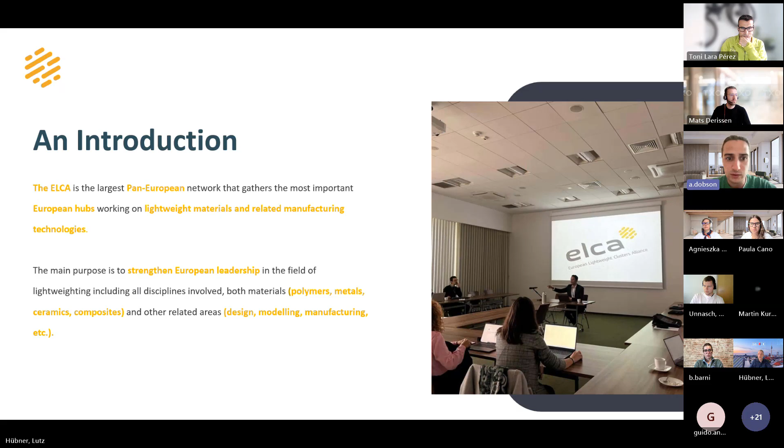Okay, so yeah, the ELCA network is the European Lightweight Clusters Alliance. It's a pan-European network gathering the most important European hubs, working across lightweight materials and related manufacturing technologies. So essentially, the purpose within the ELCA network is to try and strengthen European leadership across said domains, such as both materials and also other areas. So this could be multi-materials, for example, polymers, metals, ceramics, or composites, and areas such as design, modeling, manufacturing, smart materials, etc. So if you can go to the next slide, please. Okay, yeah, that's the right one.

So there's a multi-material approach, multidisciplinary approach, and multi-sectoral approach. So this is kind of a summary of the scope, but of course there's always room for delving deeper into different types of materials. So as you can see there, as I already mentioned, covering polymers, light metals, ceramics, composites; multidisciplinary, so across different areas within those materials, whether it be recycling or manufacturing or different techniques to look at materials, disassembly, modeling, functionalization, etc.

And through there, we have the working groups which span across different sectors of the value chain. And within sectors, we have mobility, energy, building, and industry. This is also something that we're always looking to expand within, and like today, delving deeper into the mobility sector to do some joint activities with rail transport. So next slide, please, Lutz.

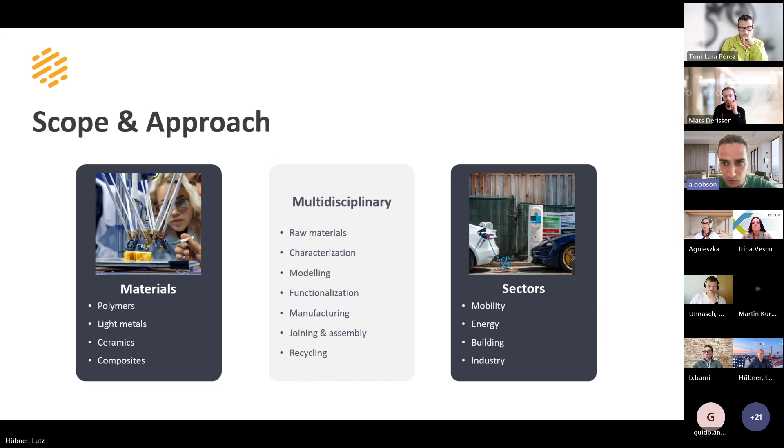And yeah, I think that's all for this slide. If you can go to the next one, please.

So as I mentioned, it's not particularly advanced, but copper is a strategic raw material in the EU since 2023. And I'm just going to show you this graph because it shows quite vividly that this material has become much more valuable over the last years. It went from this mostly overlooked metal that's always there to becoming quite valuable, with around 12,000 euros per ton in 2026.

And the main reason for this is that it has such a widespread use in electrical applications, and it's quite hard to substitute. It's what it does very well. It's not easy to find a good replacement. And the volume of copper has been increasing over the last years. We had 20 million tons of copper usage in 2020 in Europe alone, and the EU Commission expects that it will increase by 2050 by more than 50%. So it is very valuable, and for us, as our story begins, next slide, please.

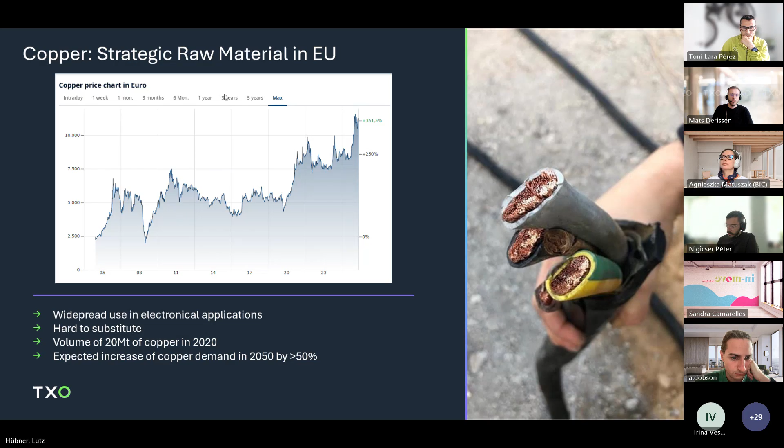We started quite early with the valuable copper material in 2007 as a company called Techport Service GmbH, and we mainly focused on the telecommunication sector in Germany. We worked with Deutsche Telekom, and we were mainly focusing on collection, transport, and logistical handling of the cables. And since then, we continuously moved on and made a shift towards a more full-service approach, so we covered more aspects along the circle than when we started.

And now, with the transformation to rail, we explored new branches. So we came into the rail sector and found out that basically the processes we have established over the last years in the telecommunication sector can be easily applied also in the rail sector. So all the processes we had already established were able to be transferred to the rail sector.

Since 2024, we became part of the TXO group, and we have had a much more international focus since then. We are still operating as a German entity in TXO, and we continuously widened our services in the rail sector. So now we have around 40 employees in Germany, 450 worldwide in 13 locations and 5 continents.

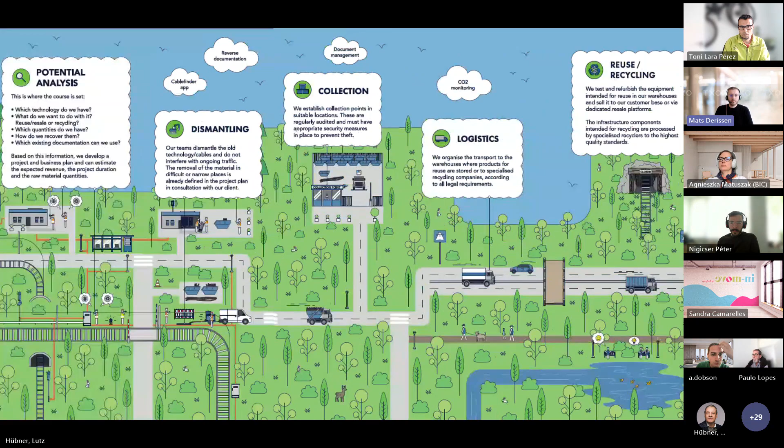We, as TXO, take care of the obsolete technology and provide all types of parts to it. So first of all, next slide, please. First of all, we start with the potential analysis. So what type of material do we have? Where do we find it? How can we access it? And oftentimes, the earlier we are invited into the process, the more materials we can recover at the end of the whole process. So if you want to get us on board, the earlier the better, basically.

And with the potential analysis, with the business plan and project plan, we can start the dismantling process, where we work closely with subcontractors we have already worked with for more than 15 years. So we know them very well. They know what we expect from them. And from that, we move on to the collection points where we store the valuable materials. We have regular security checks on these collection points, so we know the materials are safe there.

And from there, we move on to the transportation of the materials to the reuse and recycling facilities, or we prepare the material for resale. So whatever value is still in the materials, we try to shift it in the right direction. Next slide, please. And finally, we come to the reporting. We make an assessment of the material saved, the CO2 emissions saved, and also the whole transparent process. How did we get the materials? What ended up as waste? What ended up as recycling material, etc.

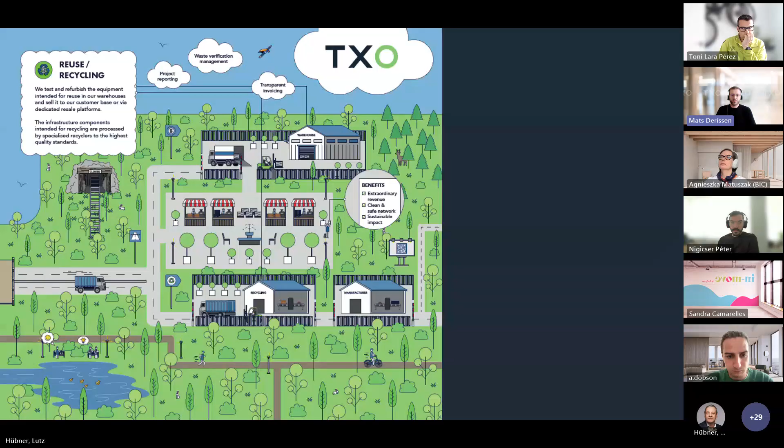At the end, next slide, please. Our main benefits are economic efficiency, mainly due to the efficient process we have established, but also the copper material has such a big value that it can offset the cost of the whole project planning and management of the materials.

We create clean networks. So after that, you can use the infrastructure again for the modernization projects, put in new cables and other technological aspects. And of course, we can create a secondary stream of copper. So we don't necessarily need to extract virgin copper from the mines, which reduces CO2 emissions as well. Next slide, please.

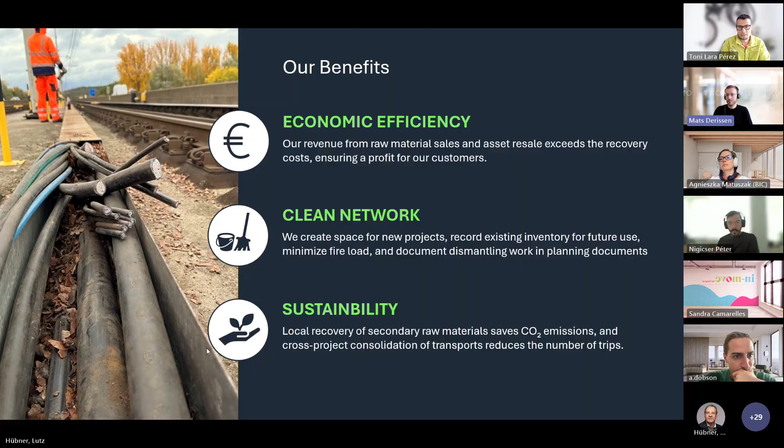No, I guess that was the last one. Oh, okay. Usually there are two more. I'm just gonna make a quick switch. Oh, one moment. You can see it? Yes.

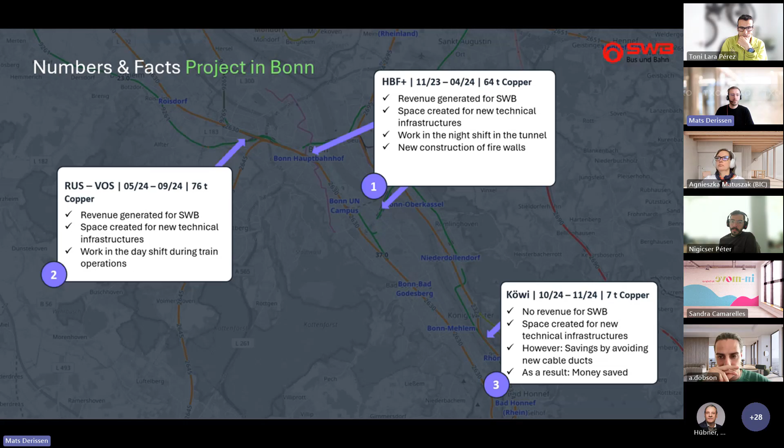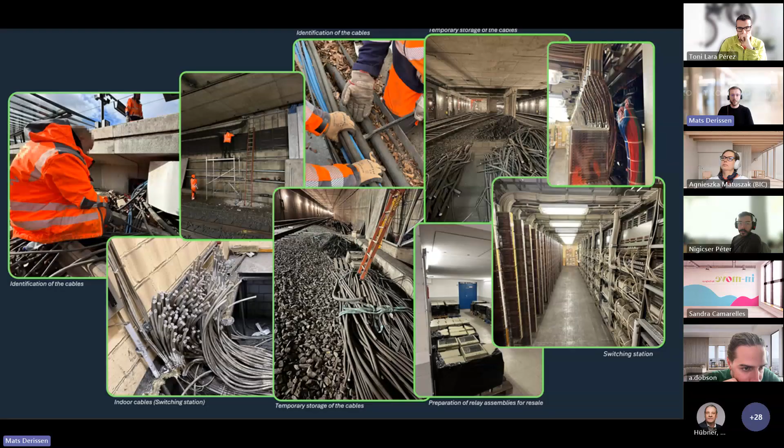And later on, we have a temporary storage, mostly of the cables, or as you see in the central right, we prepare material for the resale of it. So every time we look into the projects, we already know, okay, this can be resold, this can be recycled, this is roughly the amount, how can we exit it, etc.

And at the end, for this particular case, we made a certificate of the amount of CO2 emissions saved and the amount of copper saved. And it was also acknowledged by the local news, where they made an article about how urban mining actually works, and took our project as an example of the whole process.

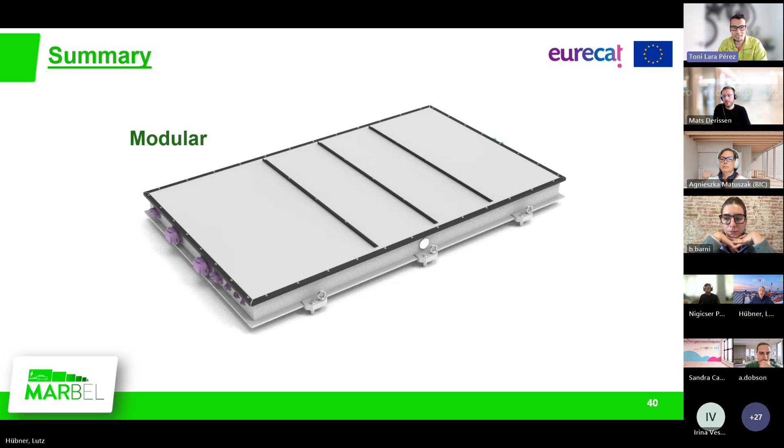Okay, thank you, Angus. So the idea is to present the battery design that we performed in the European project MARBEL, that ended last year. Please, Lutz. This is the battery of MARBEL. This battery is modular, it's lightweight. Also, it's thermally optimized and easy to assemble and disassemble. In this presentation, I will explain the modularity and the easy assembly and disassembly.

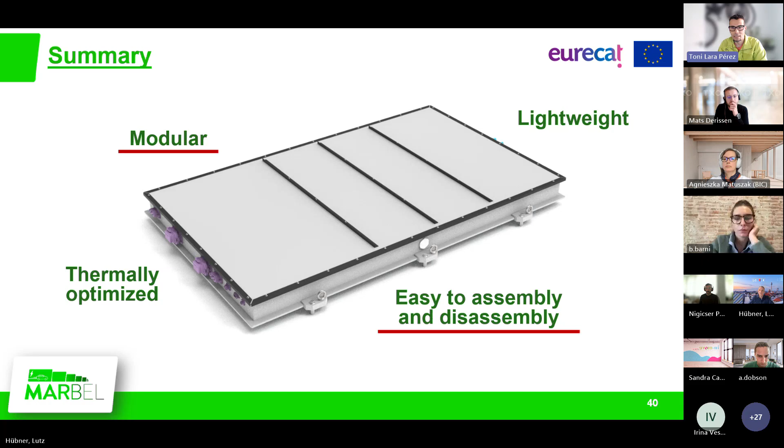Regarding the modularity of the battery, we built two different batteries: one battery of 800 volts and another battery of 400 volts. We use the same aluminum profiles for the housing, the lateral and the bottom profiles and also the turrets. The difference between the two types of battery is only the length of the profiles and the machining of the front profile used with the connectors. Next slide, Lutz.

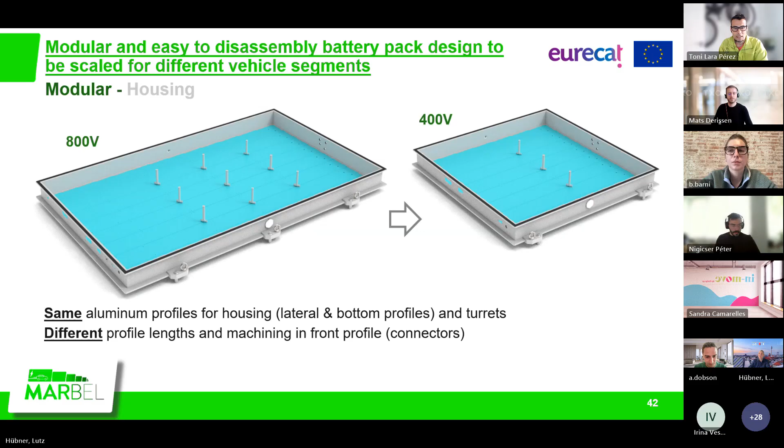Regarding the modules, we use the same modules for the two batteries, and the only difference between the two batteries is the number of modules. In the case of 800 volts, we use 32 modules, and in the case of 400 volts, we use only 16 modules. Next slide.

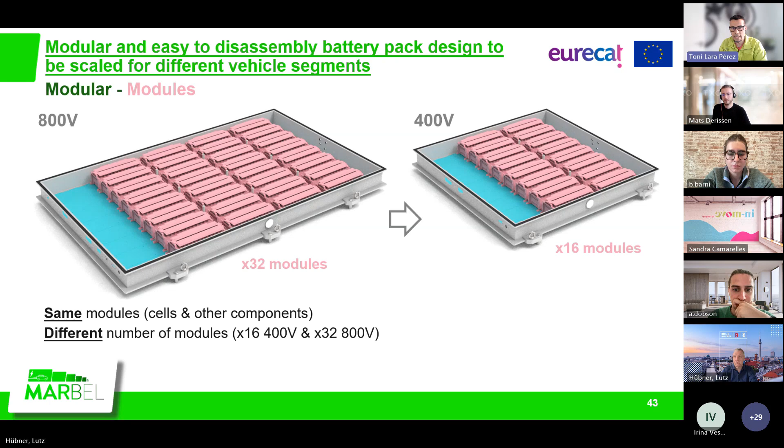Regarding the electric bus bars, the electronic components, and the connectors, we use the same bus bars between the different modules, the same electronic boards, and the same type of connectors and DC box. The only difference between one battery and the other is the bus bars that go from the modules to the junction box itself, and also the number of connectors and electronic boards. Next slide.

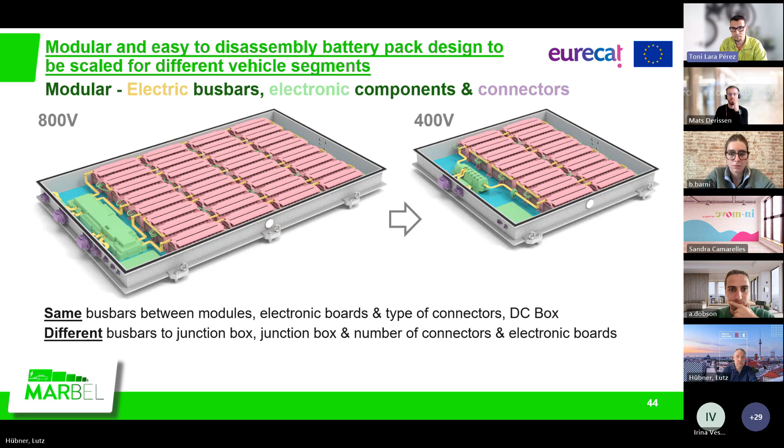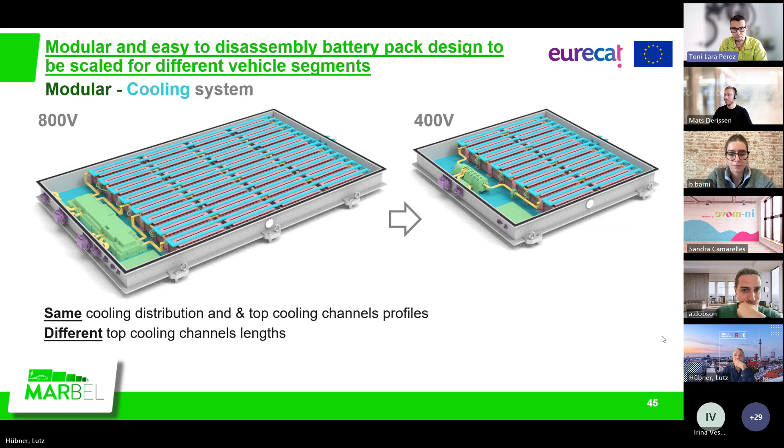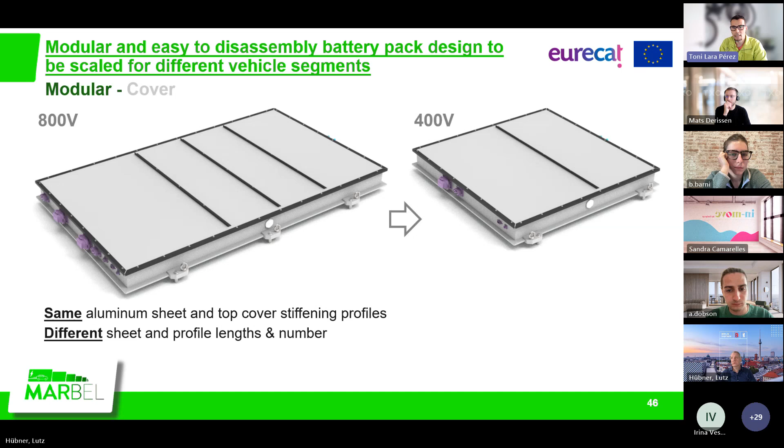Okay, next slide. Now regarding the easy to assemble and disassemble, here we explain about the battery pack. The battery pack housing was a fully aluminum housing, easy to disassemble and easy to recycle. And we use a 6063 aluminum with 60% of recycled aluminum. Okay, next slide.

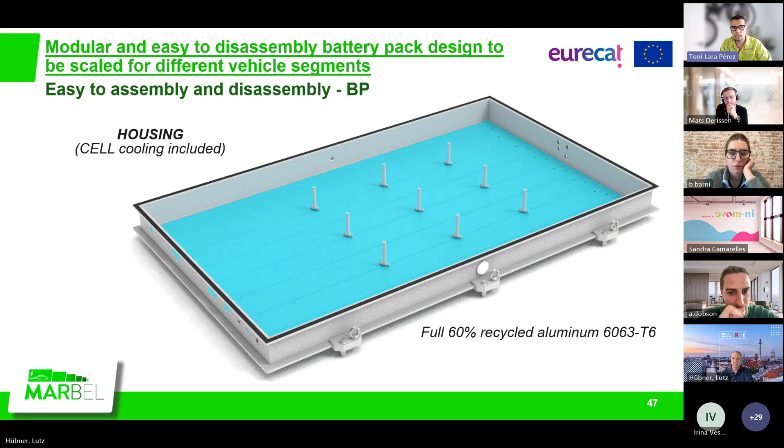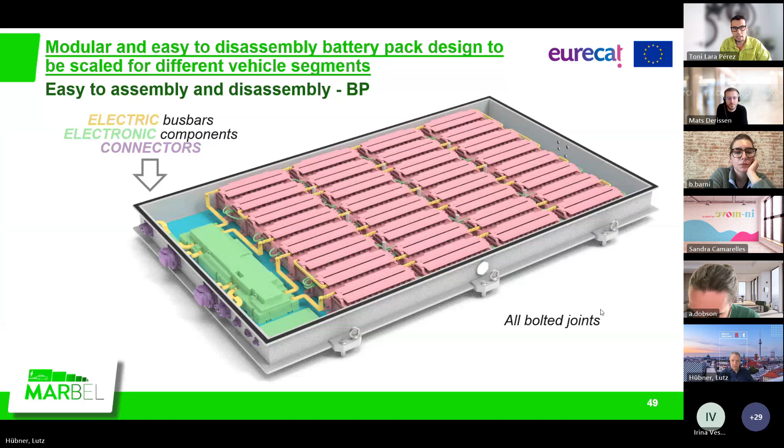Next slide. The cooling system also was screwed, okay? All the distribution of the cooling system was screwed in the housing. And in this case, we use two cooling systems, one in the bottom of the battery pack to cool the modules, and another one on the top of the modules to cool the bus bars of the battery. And these top channels were only supported by the modules.

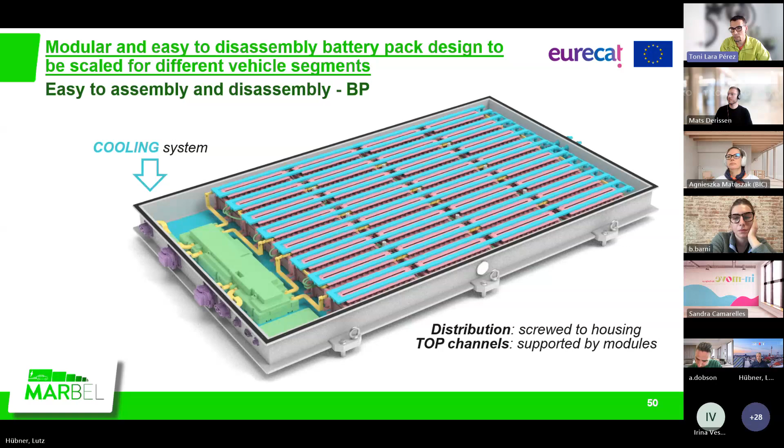Next slide. And finally, regarding the cover, also the cover was screwed to the housing. So the same principle to assemble the battery, we can use to disassemble the battery in reverse.

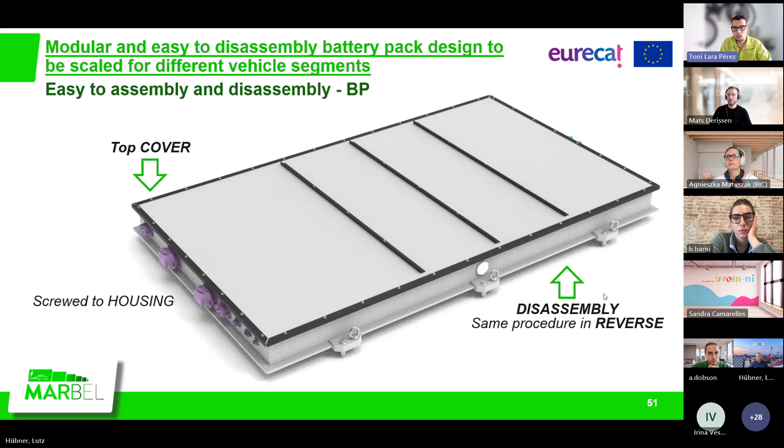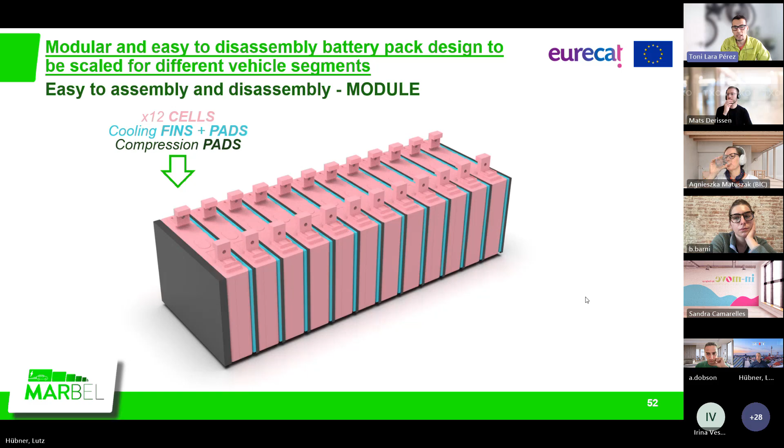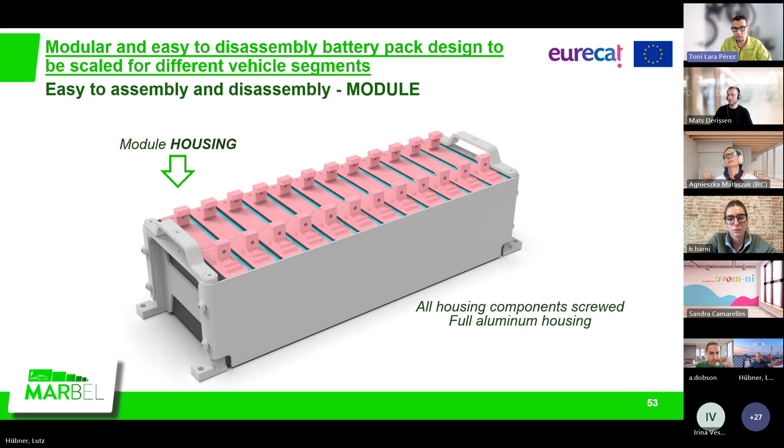Okay, and next slide. All the electronic and the electric components are bolted. Also we avoid, as I said before, the welded connections, so we can remove these electric and electronic components to repair or to remove one cell if this cell has some problem.

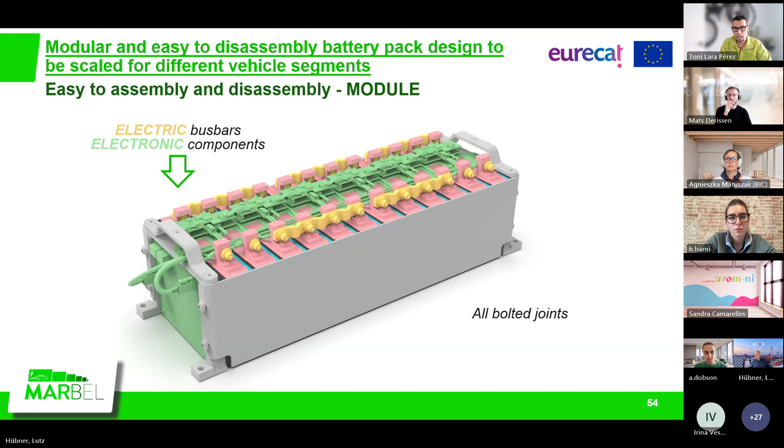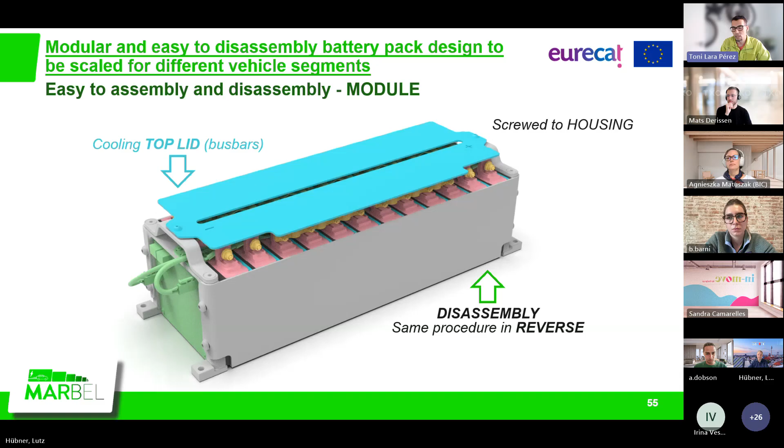And finally, the next slide, Lutz. It's regarding the top lid. This top lid is needed to cool down the bus bars, and also it's screwed to the housing. So we can use the same procedure in reverse to dismantle the full module and also the full battery. And I think that's all. Yes, it's all from my side.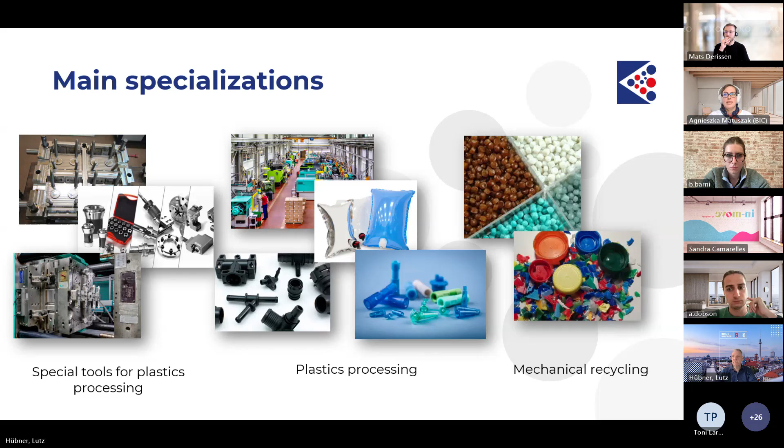Members of the cluster provide injection molds and other tools for polymer processing. They manufacture a variety of products for other branches, including automotive, medical products, cosmetics, electronics, home appliance, packaging, and many others. Our members also produce master batches, coloring agents, and modifiers, and supply plastic granules, machinery, equipment, and software solutions. They also provide services of assembly, packaging, storing, and recycling.

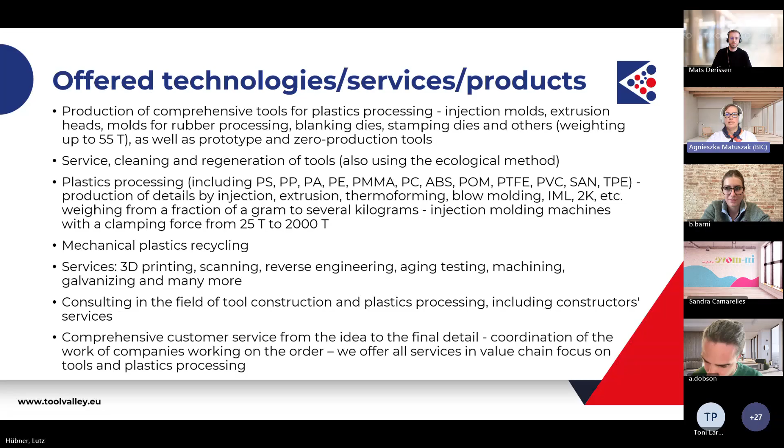By doing so, we create a value chain and a network of close collaboration that allows us to perform joint activities across many areas of the business. Next slide.

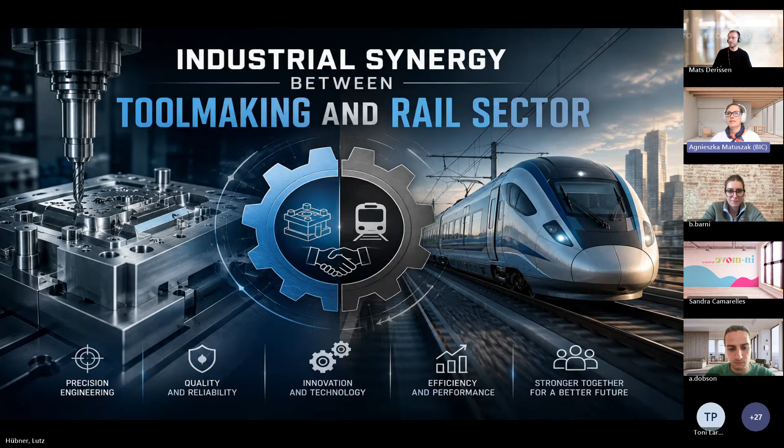The collaboration between the tool and processing industry and the rail sector unlocks a vast field of innovation. From rolling stock components to infrastructure systems, precision tooling is the foundation of modern rail mobility. Our solution bridges the gap between the tooling and plastic processing industry and the rail sector by delivering end-to-end support, from design and prototyping to serial production and component lifecycle maintenance. Next slide, please.

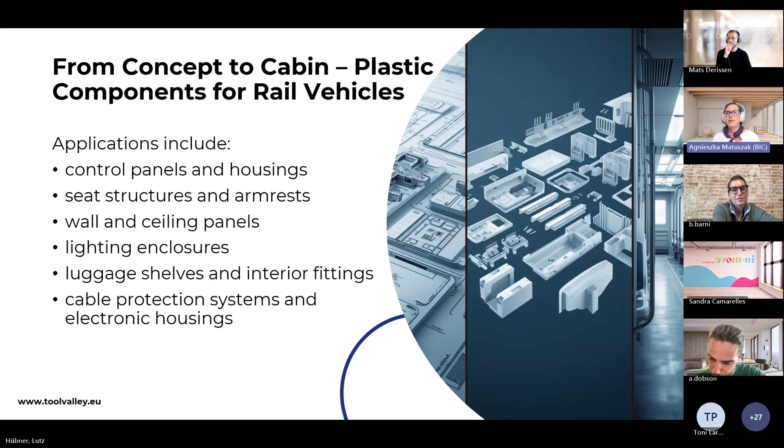Injection molding and advanced tooling enable the production of critical interior and functional components for trains, trams, and metros. Applications can include control panels and housing, seat structures and armrests, wall and ceiling panels, lighting enclosures, luggage shelves and interior fittings, cable protection systems, and electronic housing. Plastics are now essential in both passenger and driver cabin environments. Next slide.

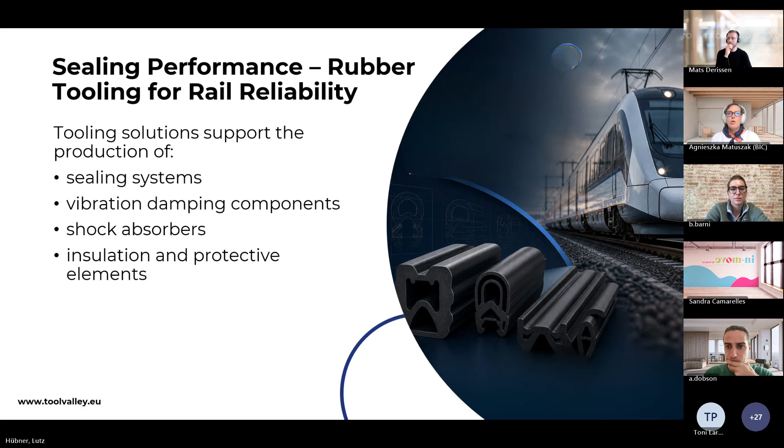Rail systems demand durability under extreme conditions. Tooling solutions support the production of sealing systems, vibration damping components, shock absorbers, insulation, and protective elements. Precision rubber tooling ensures safety, comfort, and long-term operational reliability. Next slide, please.

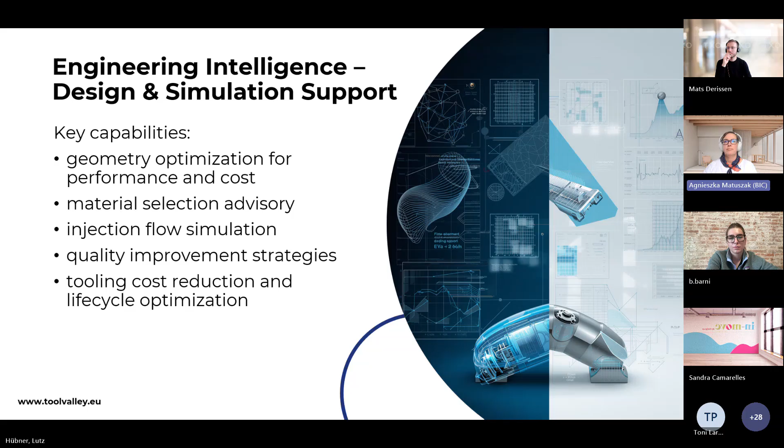Modern tooling is not just manufacturing, it's an engineering partnership. Better design means smarter production from day one. Key capabilities: geometry optimization for performance and cost, material selection advisory, injection flow simulation, quality improvement strategies, tooling cost reduction, and lifecycle optimization. Next slide.

Speed matters in rail innovation. We enable rapid prototype tooling, 3D printed molds, inserts and components, pilot production runs, technology validation testing, from idea to functional prototype in record time. Next slide.

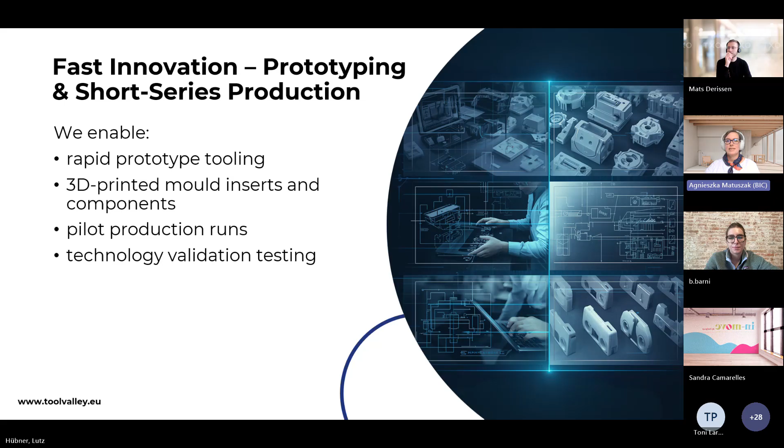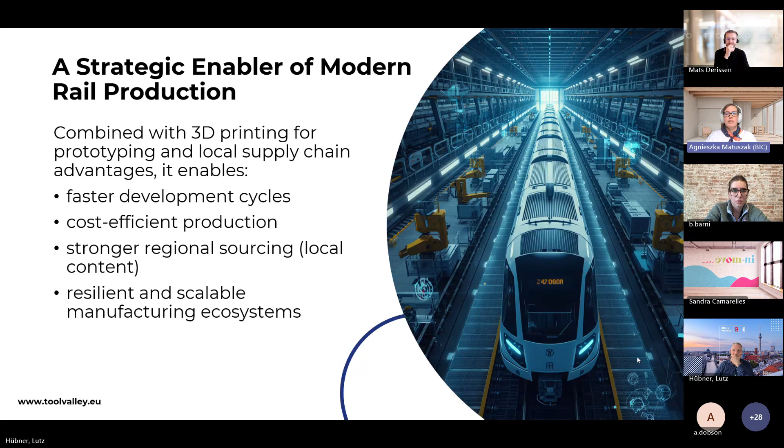Probably we will go to the last slides. Yes. So the high quality and extensive scope of the offered services is a result of technological advancement and innovative approach of the cluster members and the cluster's close collaboration with R&D units. Owing to this, our companies supply products to the largest global companies operating in various branches of industry, to almost all European markets. We invite you to do business with us. Thank you.

So I wait for two seconds for Angus. Thank you, Agnieszka, for these interesting insights into your cluster structure and topics. It was very interesting to us. And I'm asking Angus if there is an additional pitch. From what I gather, I believe there was some interest from Martin. Let me check. Martin from RISE, I believe. Yeah, okay. I see him here as a participant.

Hello. Yeah. Thank you very much, Lutz. I believe it's a bit of a last minute entry, so we're very appreciative. Yeah, I can just pitch shortly who we are. I just need to reopen the slide here and share with you. And I can send it to you afterwards. Wonderful. Thank you very much.

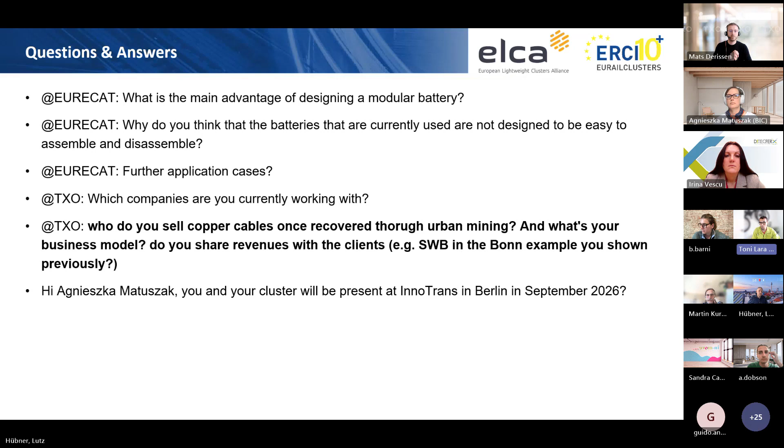The main advantage of the modular battery is that it's for different types of cars, because we can use the 400 volt battery for one segment of cars, little cars, and we can use the 800 volt battery for another segment of cars. But we can also use the same battery for a bus or for a train, because it's a modular battery. You can increase the battery if it's necessary, so you can build the battery as you want.

Yeah. So then I have at least two questions for Mats from TXO. Which companies are you currently working with, Mats? Yes, thank you very much, Lutz. So currently we are working with metro providers in the larger cities in Germany. I just showed you the example of Bonn, but it's also in Stuttgart, Cologne, and Nuremberg.

So they are the smaller sized companies in regard to the rail systems, but we also work with OEMs such as Siemens Mobility, and we just started now to expand into the international market, with first projects in Salzburg in Austria, and we are also piloting in France.

So what we experienced over the last couple of years is that the process we have established is easily applicable to all types of partners, smaller scale and larger scale, as well as OEMs, and it's applicable in Germany and also in other parts of Europe. So this is the range of partners we are currently working with.

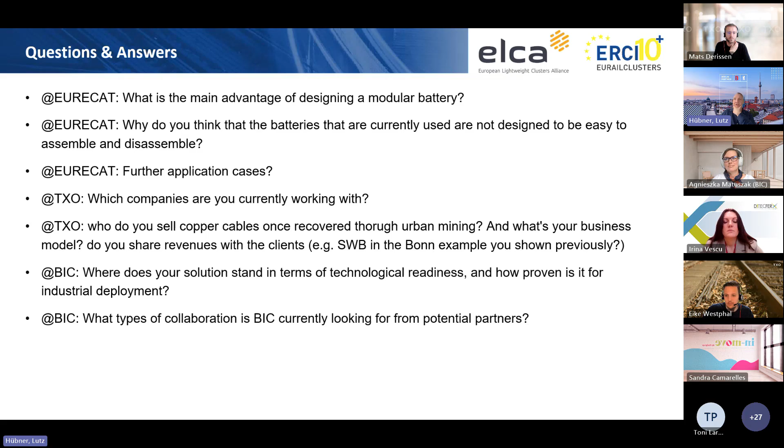All right, thank you. Coming back to TXO, 3 important questions. One question, when you send off for recycling, do you know what happens with the remainder of the materials aside from copper, the plastics, etc.? Yes, thank you for the question. We track everything within our system, and for example, in terms of the plastic, we know that they're recycled for the traffic components. So when you build a construction site, barriers, the foundations. Yeah. So these big black plastic foundations, they're usually made from the recycled plastic from the copper cables. And so we have a very clear understanding of what happens with different streams and have it all in our systems.

The main challenge, I would say, currently is in the first phase, the potential analysis, that along the work we identify more and more potential which we didn't know in the beginning. So it makes it much harder for us in the work to rearrange and find, oh, we can also change that, or we can use, or we can have new sources found within the work we haven't previously found in the potential analysis.